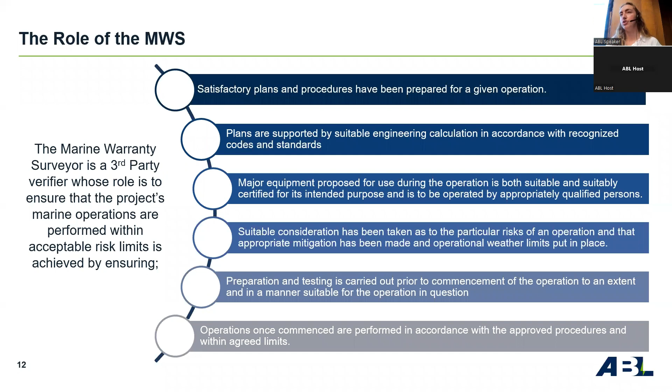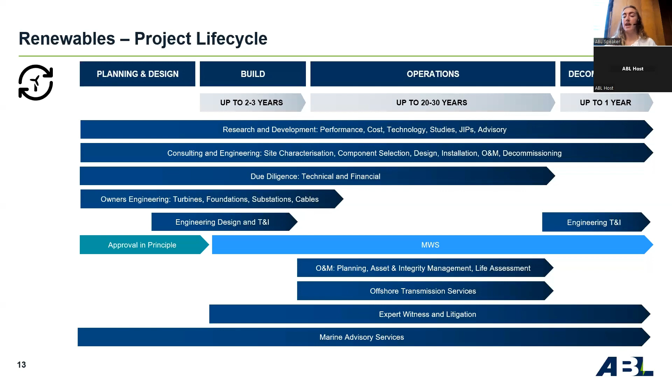As you can see here on the left, there's another aspect which the MWS may get involved in, which is called approval in principle. So this is mainly for projects which have innovative or novel methods or technologies that are going to be used. And this is to help ensure buy-in from an early stage and make sure that there's inclusion of all of the potential risks.

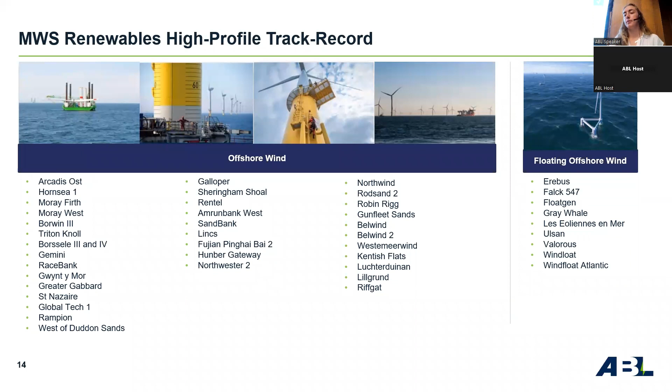So this presentation is going to outline some of the risks and emerging risks in fixed and floating offshore wind, which are based on our experience. And as a group, we've worked on over 330 offshore wind projects, not just from an MWS perspective, but also owner's engineering and analysis. So I'll now hand over to Paloma, who will talk about the future of offshore wind.

Right. Thank you, Charlotte. Okay.

All right, so let's look at where the industry is heading towards. We can all agree that offshore wind is booming, and with the need for more clean energy, it looks like it's only going to continue to grow. So how can the industry make more energy?

First of all, we can have bigger wind farms. We can put these wind farms in deeper seas. We can have floating wind, so we can actually put the wind farms in deeper seas. There are also alternative energy sources, such as wave, tidal, solar. Ocean thermal energy conversion, OTEC, have become an attractive new method for islands who are looking to have sustainable energy methods.

There's also the new concept of having energy islands, such as the ones being developed in Denmark and Belgium. And all those methods are powered by new technology that is constantly under development. And of course, with great power comes great responsibility. So what safety standards are we developing, and how will they shape the industry?

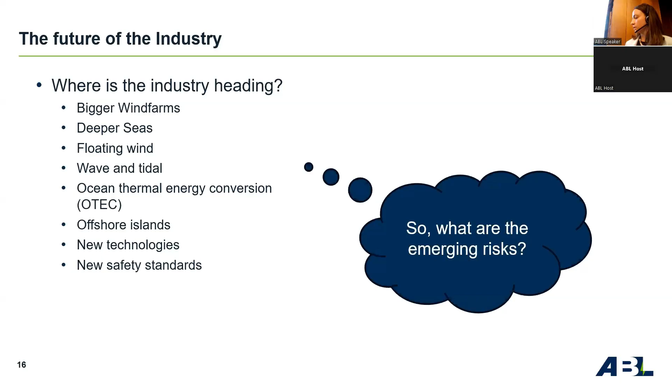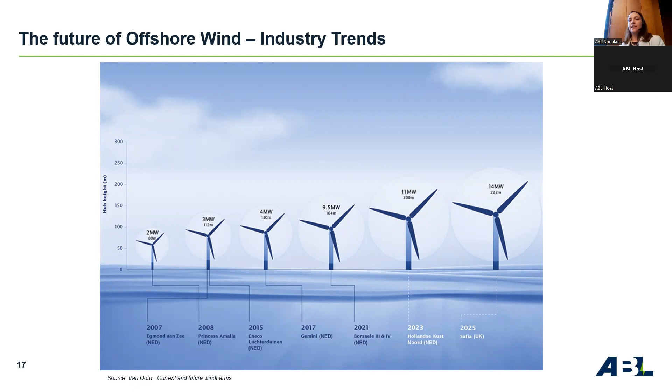The increase in power rating and size of the turbine brings new challenges and risks in the design, the installation, the maintenance, and at some point even the decommissioning. In this next figure, you can see the offshore wind farms that are being developed in Europe, and it compares the distance to shore and water depth. We see the trend is going towards further and deeper seas.

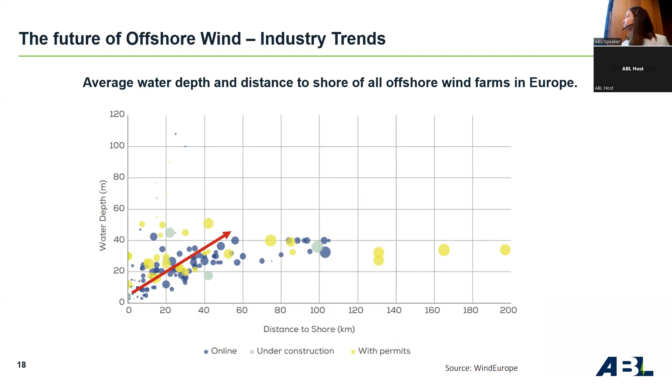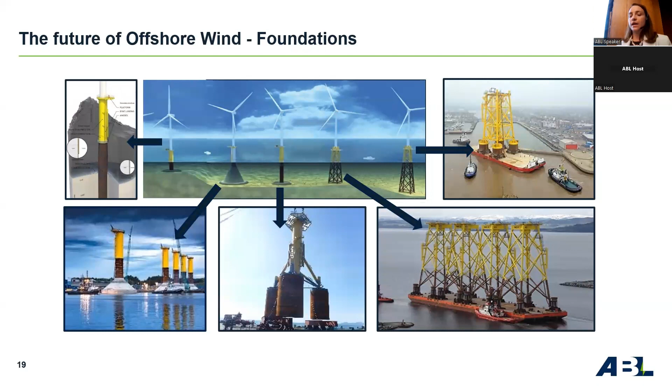So foundations are a key element of wind farms, and the designs can vary. Here we see the different types of foundations we currently have, which are monopiles, gravity-based, and different types of jackets. As the turbines increase in size, this requires different solutions, which is where placing wind turbines on floating foundations would be the next step for offshore wind, as they can be installed in a more restrictive seabed or further offshore where you can find stronger and more consistent winds.

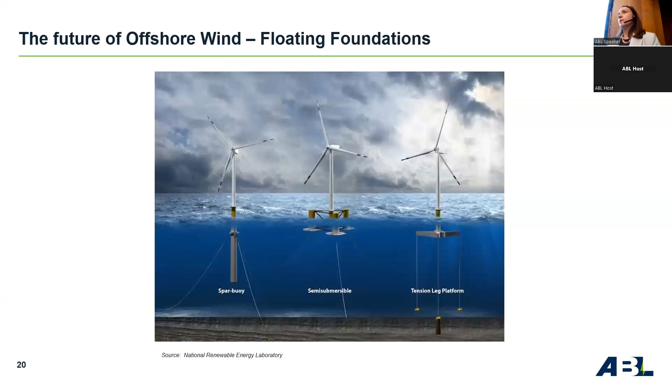However, this technology is still in its early development. There are currently numerous designs and solutions. We have here three of the main ones, which are semi-submersible, tension leg platforms, and spars. For example, WindFloat in Portugal is a semi-submersible 3-column floating foundation, and Hywind in Scotland is an example of a spar buoy floating submersible, which can be installed in water depths of up to 80 meters.

So all aspects of the wind farms are increasing in size. This includes the jackets, the substations, requiring bigger vessels to cover their transport and installation. The substations are very similar to oil and gas projects, and as they go further offshore, their concept and uses vary. Some of these OSS are manned, and others only provide a minimum accommodation to support the offshore vessels.

Now, these substations are also called OCPs, offshore converter platforms, and these are used in the offshore renewables for HVDC conversion for energy output. ABL's largest OSS installed was 10,000 tons in Germany. And we have spoken about floating wind farms. So what about floating substations? So this is the Fukushima floating offshore substation. And this was the first of its kind and was moored with 4 spread catenary chain lines.

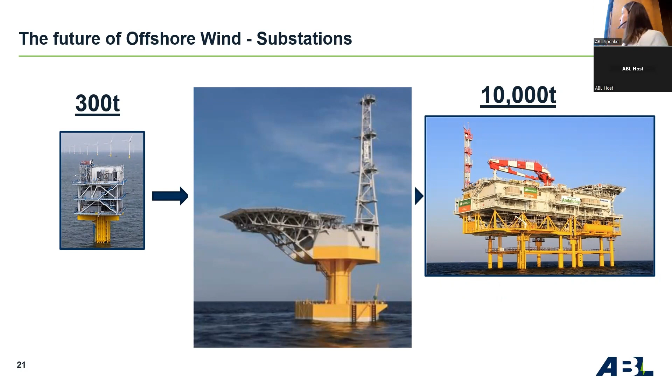So the complexity of the offshore wind project is also increasing. And as the projects move further offshore and increase in size, the conventional WTG installation, which is normally done on a jackup, as you can see on the slide, oh, you can't see it, on the left side, these jackups are limited by the length of their legs. And so we will need new methods to install these turbines. And here you can see the vessel on DP installing a turbine.

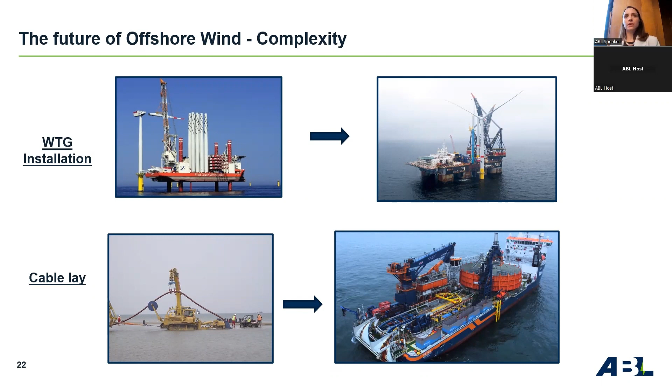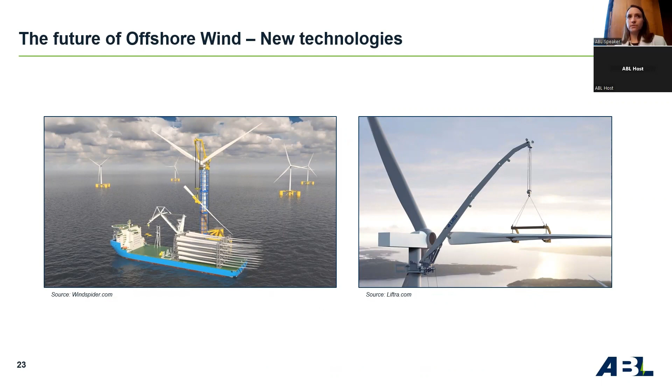For cable lays, we see that near shore, we can use dredgers with a quadrant. But as you go deeper and you go offshore, we'll need cable lay vessels. Finally, novel technologies are constantly under research and development to try and overcome the new challenges posed. Some very exciting new concepts are being created, but how do these realistically fit within the offshore wind sector? So now let's have a little look at what risks we will see in the fixed wind farms.

Secondly, we have the risk of needing new technology and procedures that have never been used before. As we conquer new, deeper seabeds, the conventional installation method of the jackup is not valid anymore, and so alternative methods are required. This is the example of the Arcadis Ost, which was the first floating installation of a turbine, and that just happened in November last year.

A method to identify and mitigate these new risks includes contractors testing the new equipment and carrying out mock-up trials, which can be done on-site or even as a simulation. As MWS, one of the ways that we can help mitigate these risks is through assessing the documentation and the procedures and attending the operations to assure that these procedures are followed and reduce the risk. Often for the first installation in series, we will ensure that the weather limits are lower and more stringent until competency for the installation is proven, and then the limits can be increased.

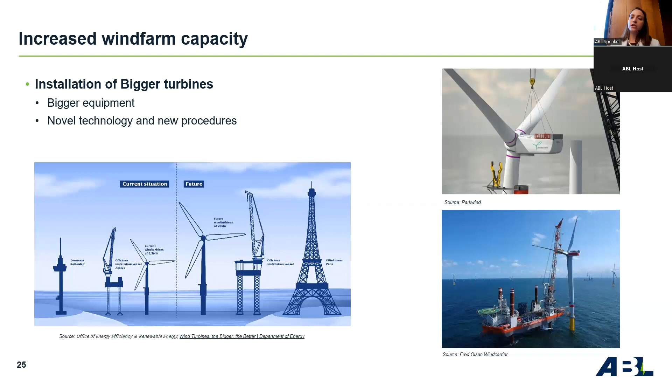In addition, good communication with the MWS is important. MWS companies have a lot of experience and lessons learned from past projects. As Charlotte mentioned before, ABL have worked on over 300 renewable energy projects. Always retaining third-party independence, of course, the MWS can add value, increase the understanding of projects and advise on the success and failures of past practices, as is done in oil and gas currently.

Right, another risk that we need to look at is the qualification and experience of our contractors. On the one side, we have the current contractors who are trying to keep up with the increasing work demand of the projects, and they grow their size rapidly with new and inexperienced technicians, and they don't always provide the necessary learning tools or time to develop properly. On the other hand, there are the new players who want to get involved in the industry, and they do this by lowering their prices during the bidding process.

The clients and the contractors need to be aware and do due diligence when selecting the contractors to ensure they have sufficient knowledge and experience for the specific operation, to not generate an additional risk. It is important to remember that this attractive low price might become expensive in the end, and focusing on quality is a good way to help de-risk the project. A risk to consider is interaction between the contractors as well. A wind turbine will have different contractors for the foundations, the cables, and the turbine components, so good communication between the main players is important to ensure that all the risks are understood correctly.

And finally, another risk from the contractors is, again, the misunderstanding of the role of the MWS. The International Marine Contractors Association release from 2022 specifies that the contractors should be involved in the selection and basis of engagement of the MWS. This is because when they apply for a project with a lump sum, comments from the MWS have cost them some money, so they should be involved in the choice of who makes these comments. This kind of goes against the whole point of having an MWS to reduce the risk.

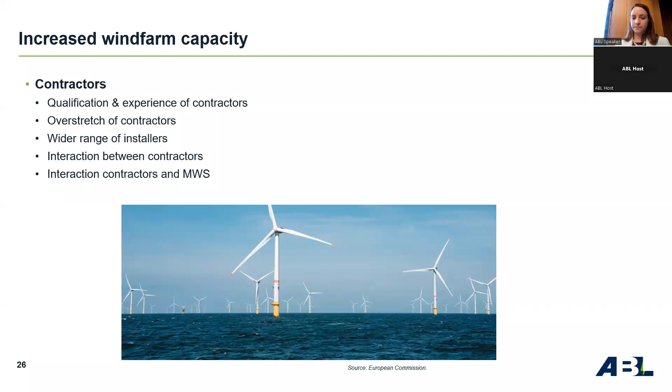Right, so we have discussed the installation of turbines further offshore in the deeper seas. So what other risks will this bring? First is the environmental risks, environmental limits. These will remain very similar as we move further offshore. However, you will encounter worse weather conditions, which can lead to smaller weather windows and consequently weather delays. In addition, these areas are typically higher energy seas, and they bring big risk when you're looking at installing a tower onto a monopile. Consideration from both client and contractors needs to be kept in mind. This communication between all parties is key to capture the installation risks and the interface between the components.

In addition, due to the lack of vessel availability, many operations are taking place in the winter months, which again increases the risk of weather delays. And these are not just weather delays on the installation, but also on basic crew changes, such as helicopter and CTV changes.

Another risk we have touched upon is the drive to reduce cost. For example, in fabrication, selecting locations where cost is less to produce, or due to the lack of local facilities with the capacity to carry out the work, this can lead to longer transit times and, again, more delays. There are tools to carry out voyage simulations and metocean analysis to help identify and mitigate these risks that are associated with transportation. The image here presents, can I point?

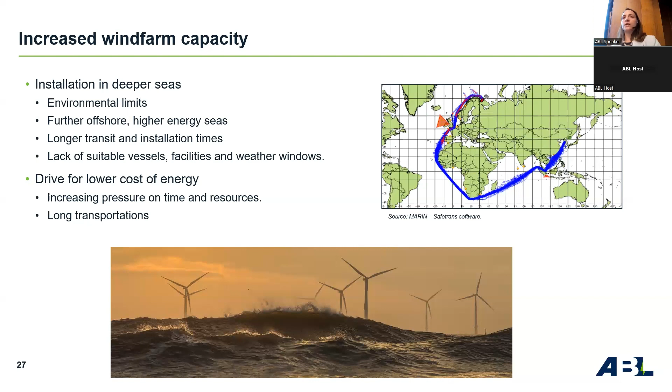Now, this presents an example of a sea transport analysis, which highlights in red, for a transport going from Asia to Northern Europe, where the weather criteria will not be met. Due to many projects running in series and the vessel availability, there is a knock-on effect on projects with delays, and this can push a project to be carried out at a different time than originally planned. So it might go into September and October when it was initially planned to be done in June or July.

Now, cables. Cables make up about 40% of the insurance claims. However, they are around 80% of the cost. A single export cable can cost up to £12.5 million to repair. It means that it's the most expensive cost for the insurers, and it creates the most worry.

So what types of claims are we looking at? There are three main areas where cable failures take place. It can be a fault from the manufacturer or a design defect. It can be a fault during installation. This is where you can find damages such as compromised MBR, tension, compression, or possibly physical damage from a dropped object or an anchor strike. The last one is latent defects, which can be from manufacturing or installation, but the damage only shows up later in the life of the cable, perhaps after 10 years of being installed.

For a cable to be repaired, it needs approximately 32 days from when the damage takes place to when the cable is repaired, and this includes getting the procedures, finding a vessel, and actually carrying out the operation. But of course, some can take even longer and be more complex. Some cable manufacturers are going into framework agreements with cable repair companies to ensure that they are prepared in case this happens and reduce the time and cost of such operations.

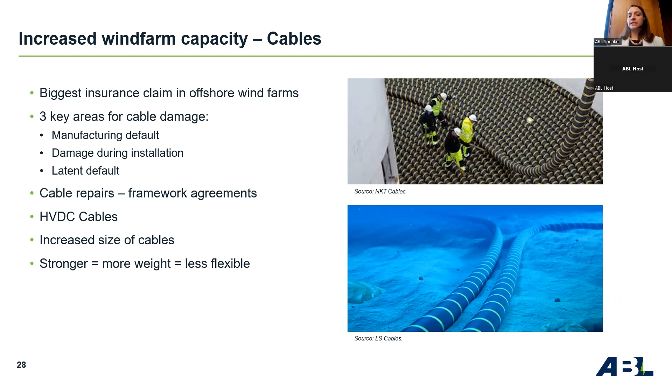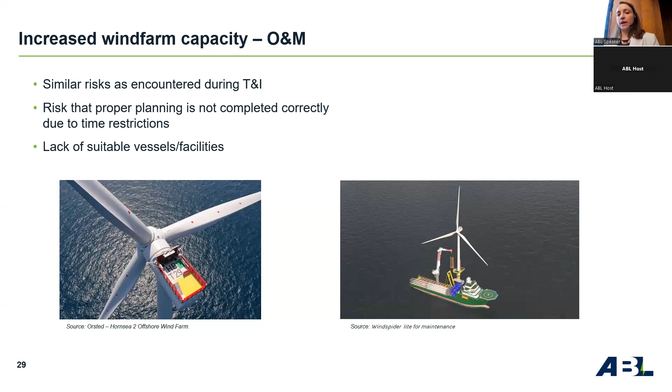Lastly, we will look at O&M. We will see the same types of risks that we have covered in the previous slides, but there are some additional risks that O&M will bring. These operations are usually carried out in a much shorter time frame than the T&I and are more reactive in nature. The process of creating documentation and preparing for operations can be undertaken in a couple of weeks, and therefore it's important to ensure that no corners are cut in this process. Having a client rep to oversee operations offshore to ensure the proper processes are carried out is a good way to mitigate these risks.

And now I will pass over to Charlotte. Thank you very much, Paloma. And now I will talk about some of the risks in floating wind farms.

Floating offshore wind is predominantly in the demonstration phase, with most projects still under development. There are a few operational floating wind farms: the one Paloma mentioned off Scotland, Hywind Scotland, and also WindFloat Atlantic off the Portugal coast. These demo sites are much smaller in scale than typical commercial operations, with the two mentioned having 5 and 3 turbines respectively. However, they are useful for increasing understanding of floating wind operations and collecting data.

Floating offshore wind obviously brings about new challenges compared to fixed offshore wind. Primarily, this is due to the increased distance from shore and the depth at the sites, as well as the very nature of floating wind and having a moving platform, which greatly increases the complexity of the operations.

So one of the risks to projects will be the lack of suitable vessels and facilities. So this has a few different aspects. Firstly, tow to site. So for towing the wind turbines to site for installation, this will require anchor handling tugs with a very large bollard pull, possibly about 220 tons or more. However, there are only a limited number of vessels of this size, about 50 in the world. Therefore, more vessels will need to be built. Otherwise, this will limit the capacity for projects, as they are already used for other purposes.

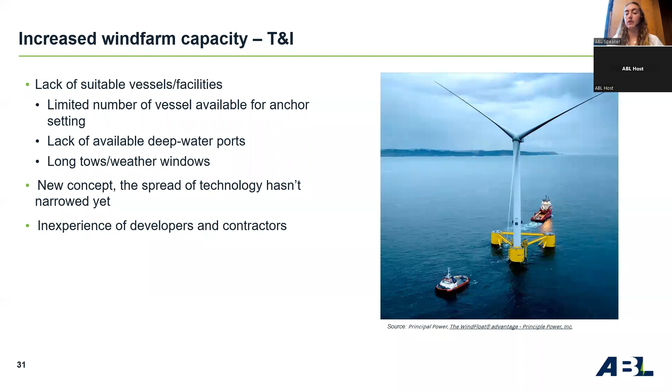So it'll be important to think about whether there's been consideration of the contracting mechanisms within the project. Have you considered the experience that the developers and contractors have in carrying out this sort of work? Has there been sufficient testing, risk assessments for the new technology or methodology that's being developed? So moving on, we will take a look at cables for floating offshore wind.

So for these cables, one question is to ask, how will it be done safely and successfully, ensuring that the cable integrity is not compromised? Has there been sufficient consideration of the design and the fatigue life? So for floating offshore wind, it's typically dynamic cables that are used, which have increased complexities, increased length. They take learnings from offshore oil and gas projects. So their installation is more complex due to the installation of buoyancy modules.

One other major risk is that there's no specific design codes for dynamic cables currently. Instead, the requirements are based on those for similar structures which may not be representative. But it should be noted that data about failures and maintenance from demonstrator projects and early projects will likely be used in future to better understand the fatigue life of the cables, in addition to extensive onshore testing.

So one other risk is increased handling of cables. So if the turbines are required to be towed to port, such as for maintenance, this could increase the number of times the cables need to be connected or disconnected. So we need to look at how much does this increase the risk? So to tackle this, there are many systems in development looking at different connection types and innovating designs to increase efficiency in operations and to reduce the risk if the cables do have to be connected.

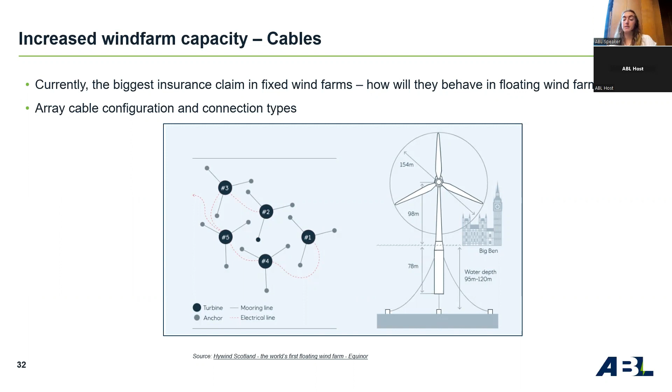One example of this is plug and play connectors, such as used for the Windfloat Atlantic. Innovative solutions such as these may reduce some of the risks of cable handling. However, they'll need to be carefully tested and assessed to ensure they don't cause additional problems. We'll now look at the mooring systems. So these are similar in some concepts to oil and gas.

However, unlike oil and gas projects in which they typically have one large structure with multiple lines, in floating offshore wind, there's likely to be large numbers moored, each with a minimum of 3 lines. So one major aspect is looking at optimization of the systems for cost while respecting the redundancy requirements.

So some learnings from the oil and gas is regarding the failures of mooring lines and chains. In floating offshore wind, there's obviously a lot more structures moored. So there's an increased risk of failure compared to something like an FPSO. And also we have to look at the fact that there's large motions of these floaters. Another difference is that these floating offshore wind turbines are unmanned. So things like routine maintenance are more challenging.

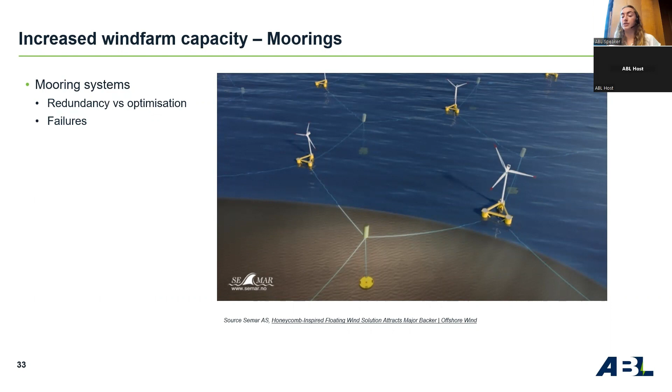And moving on to look at O&M. So this is something, as I've mentioned, where there's tow-to-site solutions and also in-place solutions. So as the floating offshore wind develops, the number of these technologies will reduce and experience will be gained by personnel. So in development of these solutions, the involvement of marine warranty and third parties at an early stage is good practice and ensures that the risks will be considered. This will also help in the approval process.

So for the tow to port, obviously there are restrictions such as the weather is a big one of them, the port availability, which I've mentioned, the risk of the connecting and disconnecting. So these are the different risks that you have to weigh up depending on which solution. As mentioned, the weather plays a large part in the project risks. Although the weather limits may be similar to those for fixed wind, due to the location of wind farms further offshore, there's likely to be higher downtime due to the higher energy seas and decreased windows for possible maintenance.

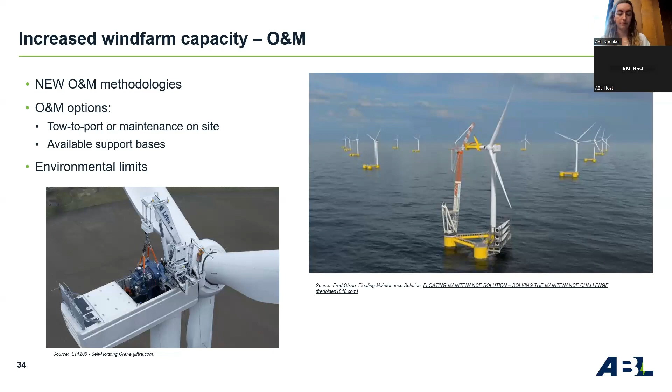Part of the consideration will also need to be into how projects are managed due to the possibility of operations being carried out in marginal weather otherwise, as people rush to try and get the job done. In addition, other aspects to be looked at are human factors, such as the training of personnel to tackle this lack of experience. So moving on, we will look at a couple of other aspects that could pose additional risks to offshore wind and should also be considered.

So one of these is climate change and resilience. So obviously climate and weather play a really important role in the design of offshore structures. And they're an important consideration during the lifetime of structures, from the transport and installation stage all the way through to the decommissioning. There are obviously many potential impacts of climate change, not only the change in temperature that could cause the sea level to rise, but also the changing weather systems could result in changing wave heights and wind speeds. And given the reliance of offshore wind on these climate systems, it's something that should be considered.

Typically, we use current and historical data as a baseline for future design. However, it doesn't take into account potential changes that might be seen in the next 20 to 30 years, considering the design life of new structures. So when looking at new designs of wind farms, it's something we should ask ourselves, are these designs suitable for the future? Have the potential changes in the environment been considered?

And finally, we'll take a brief look at the risks in contracting for both prime contractors and MWS. Although there is a shift coming to more of a cost plus time and materials model, a lot of the upcoming projects already have locked-in lump sum contracts, which were signed some time ago, and therefore contractors will need to service these contracts, which may not finish for another 3 years.

Due to rising costs of resources, there is a danger of contractors not being able to complete their scopes or trying to buy themselves out of contracts or taking legal action to seek additional funds and cutting corners to try and deliver to a budget, the latter of which is obviously the largest risk for the insurers.

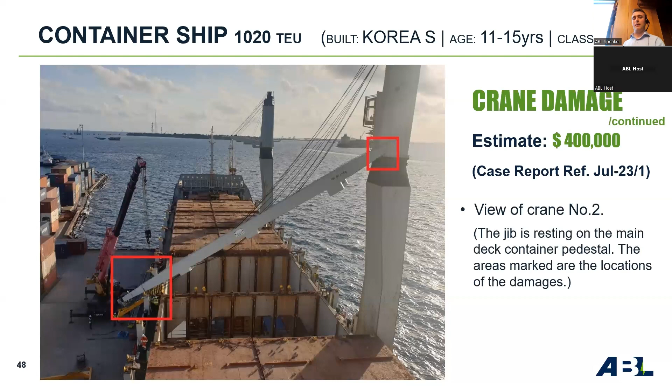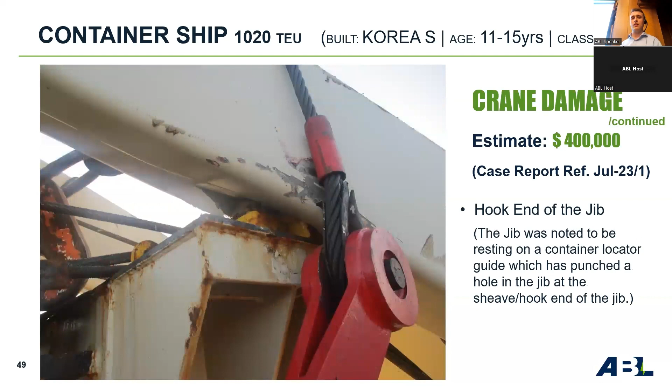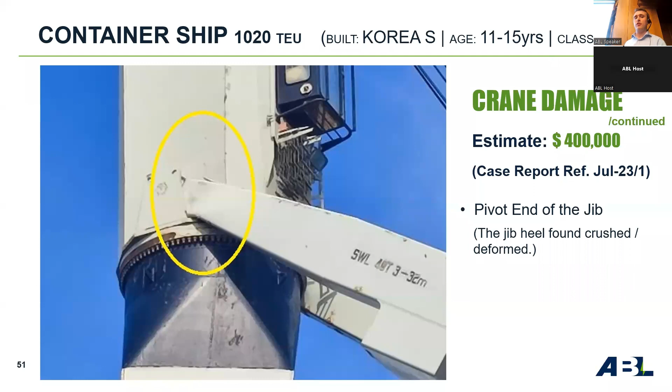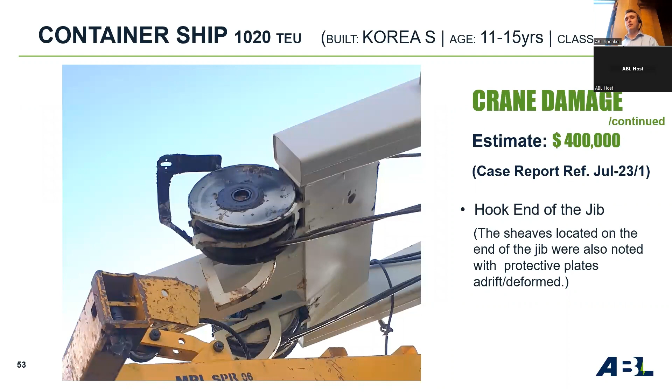Let's take a look at the damage at the end of the jib. At the hook end, here we see the arm of the jib is impaled on the container locator guide. And here we see the same thing on the other side. And here we can see, if you look closely, the pivot or heel of the jib has been damaged too on the slewing ring. Damage is clear if you look up from below. Lots of associated damage too, the sheave blocks, deck rails, and so on. The luffing wires and the hoist were also damaged beyond use.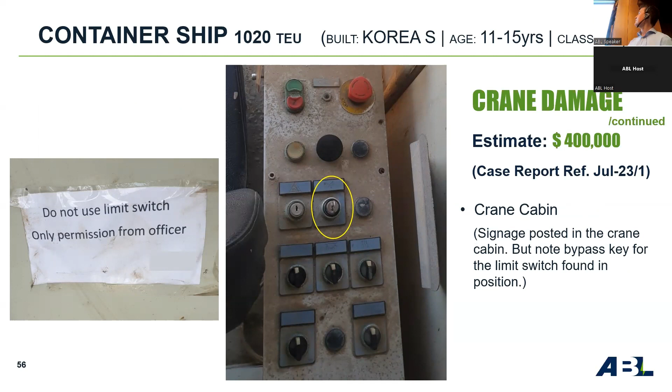Next up, we have a 16-year-old Suezmax tanker that appeared on our list a couple of months ago, having been towed to a Mediterranean repair yard, suffering $1.8 million worth of catastrophic damage to her engine's main bearings and crankshaft journals. The manufacturer's service engineers attended on board to carry out those repairs. The process of dismantling the engine found another $400,000 worth of damage.

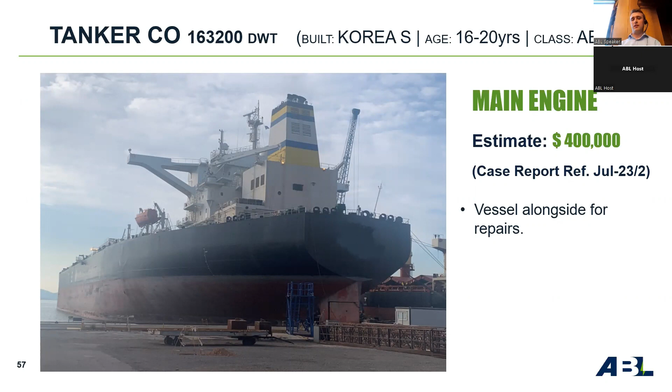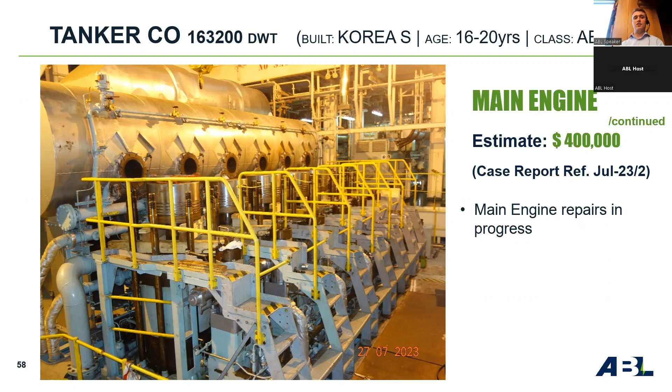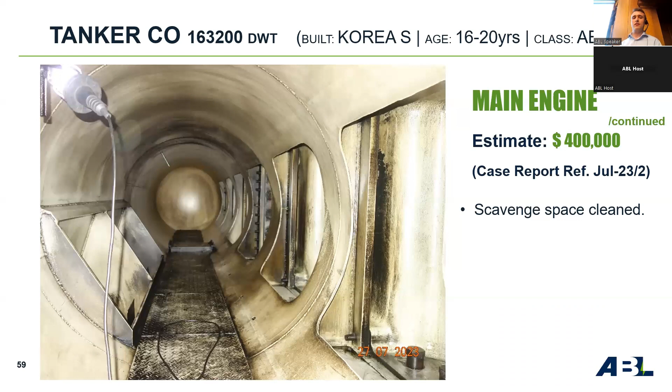The compressed inlet air is cooled and stripped of its moisture and passes into the scavenge air receiver, ready to pass into the engine cylinders, where the pistons move to the lowest position and expose the scavenge ports of the cylinder liners, these openings in the lower end of the liners. The pressurized air rushes into the cylinders and displaces the gases out of the exhaust port into the exhaust gas receiver we saw earlier, and so on.

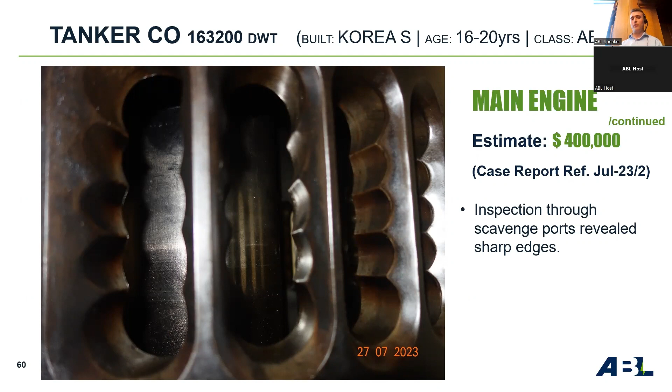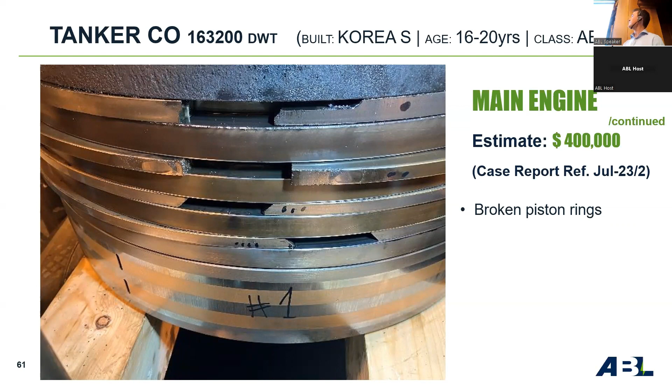Anyway, getting back to the point, I understand this is where the service engineers may have spotted the additional damage, as they noticed that there were sharp abrasions on the inner surface of the scavenge ports, indicating that there may have been some sort of contaminant in the lube oil or fuel at some point. When the engine was dismantled, they found classic symptoms of the presence of cat fines in the fuel, broken piston rings, and vertical scoring along the cylinder liners.

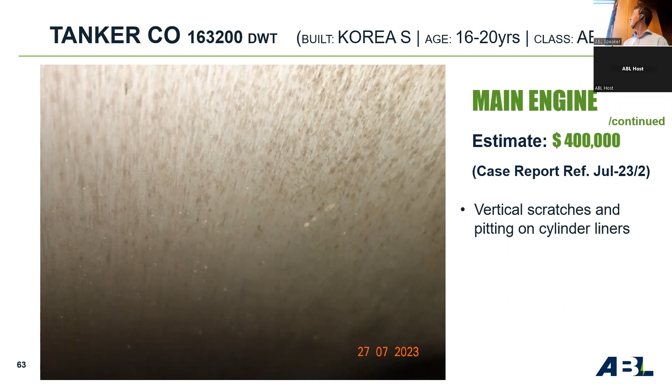Replicas were taken from all the liners. As a result, the catalytic fines were indeed discernible on the surfaces. The cause of the cat fines entering the engine is still under investigation. The big related questions are, as always, first, whether the fuel supplied and used since the last cylinder inspection was within normal limits for cat fine content, and second, whether the onboard purifiers were working properly and had been properly maintained throughout the period. Quite a lot of digging needs to be done.

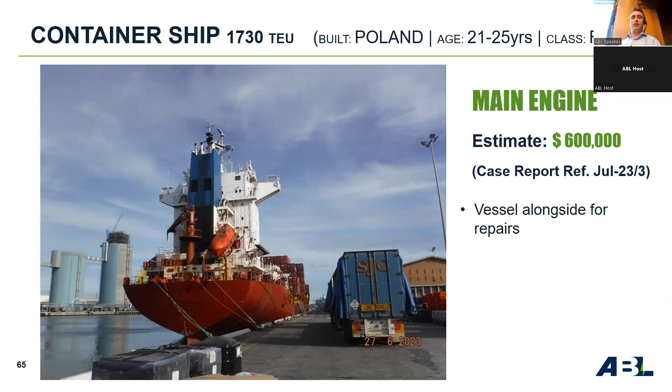The next case is for a main engine problem. It's a bit unfortunate. Had things gone right, it wouldn't have cost past $200,000, the threshold, and ended up on our high cost list. She's an elderly feeder container ship and was on passage in the Far East, where a crack was discovered on one of the main engine cylinder liners. Owners and authorities were notified; when the ship arrived at its destination, the containers were discharged and more containers were loaded as normal. They had spares on board to carry out the repair. They just needed to move to a quiet wharf to carry out the liner replacement.

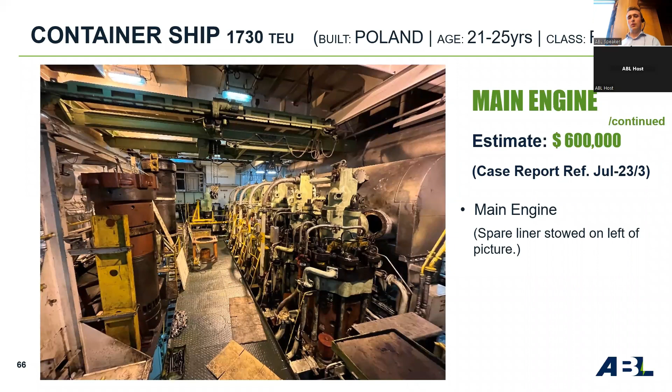Here on the right, we see the main engine, and on the left, you can see two of the spare liners that they carry on board, secured to the side of the engine. Shouldn't be any problem making the change. Take the cylinder head off, whip out the damaged liner, and put the spare one in. Here, behind, waiting for the spare, we see the old cracked liner now successfully removed and stowed. The crack had developed between two of the upper quill holes. These holes are where the lube oil supply nozzles or quills are inserted. These quills feed the cylinder liner surface with lubrication at strategic moments during the piston's travel up and down within the liner.

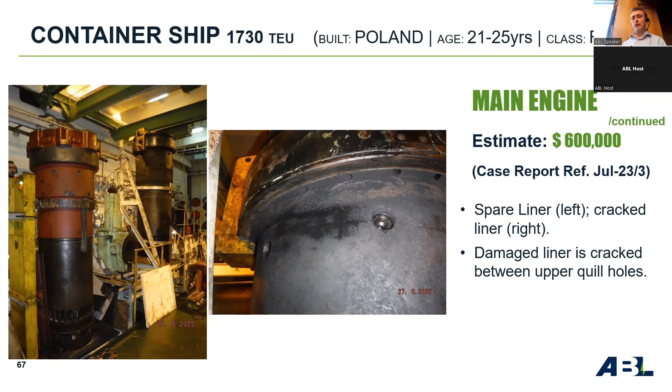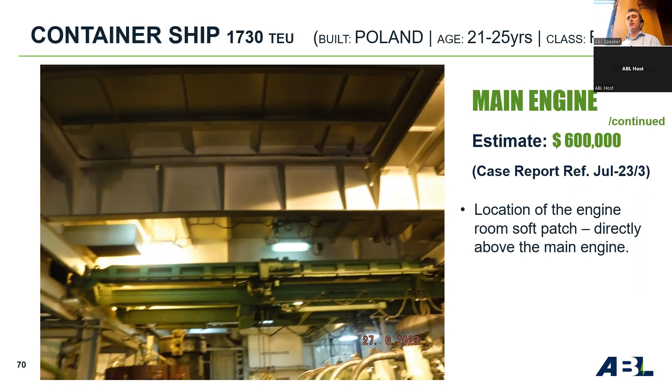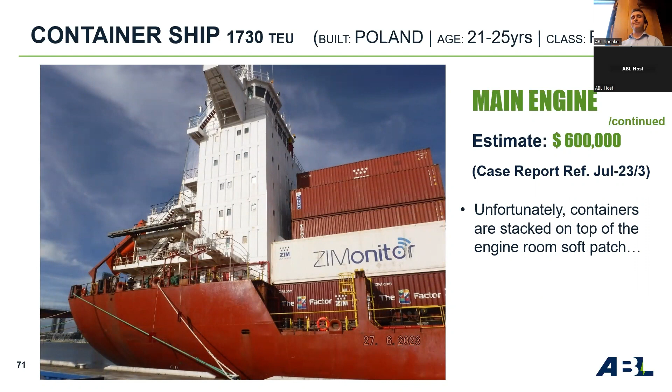Here we see the spare liner is now inserted into the engine casing, but there's a little problem. The quill holes in the liner do not line up with the quill holes in the casing. The spare liner is the wrong one for this type of engine. They checked the second liner. This is the wrong type too. This all meant that they had to order a new liner, air freight it, and get it to the engine room. In principle, getting it to the engine room wasn't a problem, as above the engine is a soft patch where they can access bulky items to get in and out. Of course, they hadn't planned on having to use it, and they had stowed containers on top of it. Yes, the access hatch is below this lot. So they would need to discharge again to get the new liner in the engine room.

So the process, from taking 2 to 4 days and probably less than $100,000, became a repair that ended up taking 25 days, involved air freight of a part, crane assistance, 2 tug moves, cargo discharge, and reloading, along with a rather large bill of $600,000. The cause for cracking of the original liner is still underway.

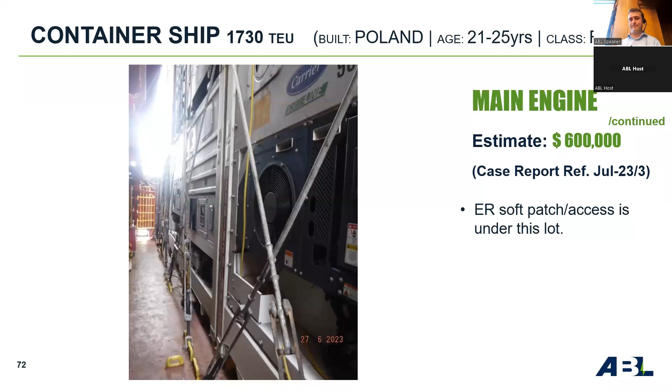This is a 10-year-old 156,000 deadweight tanker, which was in dry dock for its second special survey, where white metal fragments were discovered when dismantling the stern seals.

Things didn't go entirely smoothly in the repair either. They had already detached and repaired all 4 controllable pitch propeller blades in order to replace the O-ring seals when they discovered white metal fragments. This meant that they had to take off the blades again and remove the rudder in order to be able to withdraw the tail shaft and look at the stern tube bearings.

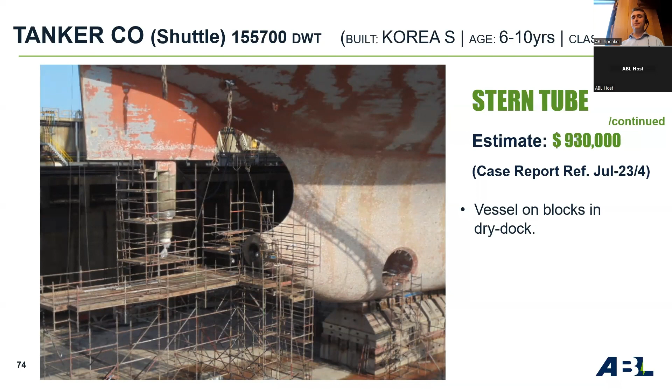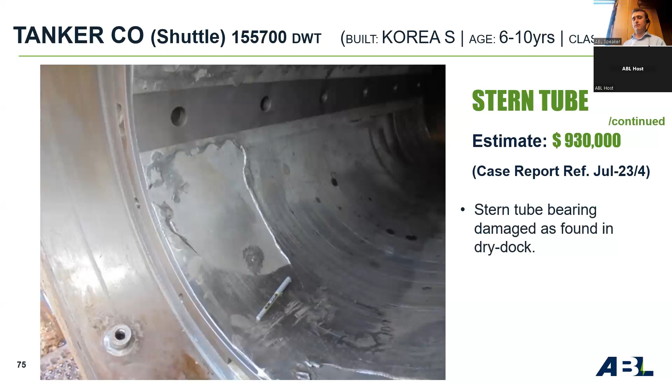And this is what they found. The aft bearing bush had been heavily scored, with metal worn out and peeling near the propeller end, though I understand the forward bearing is fine. With overheating and fretting being evident, the manufacturers recommended a new bearing. With damage like this, lots of checks have been made on the condition and alignment of the tail shaft and the engine with respect to the stern tube bearings.

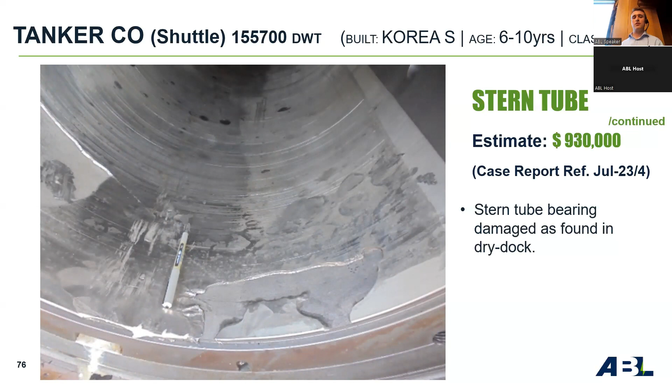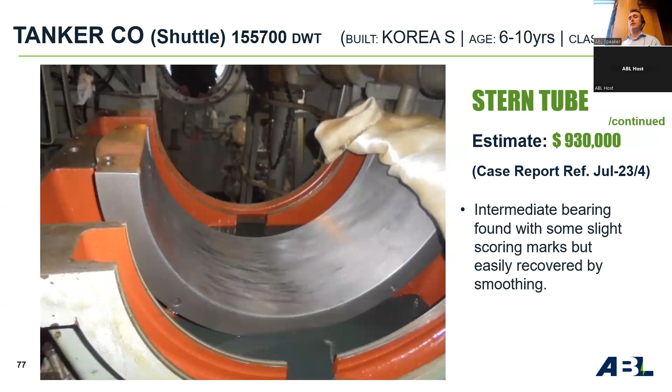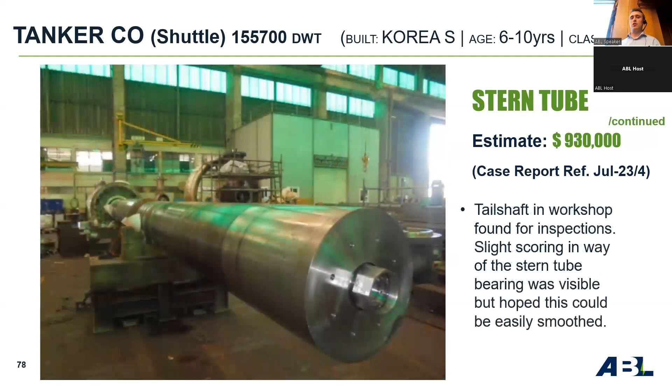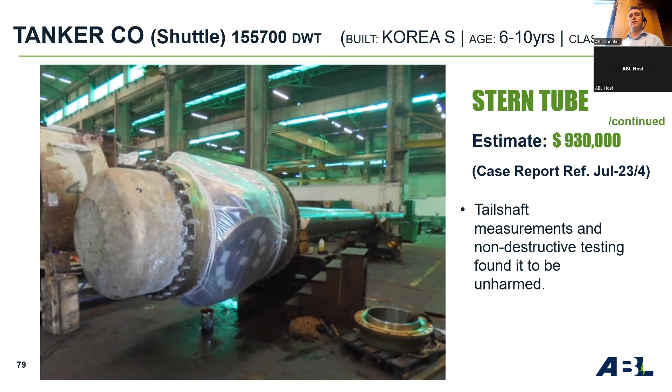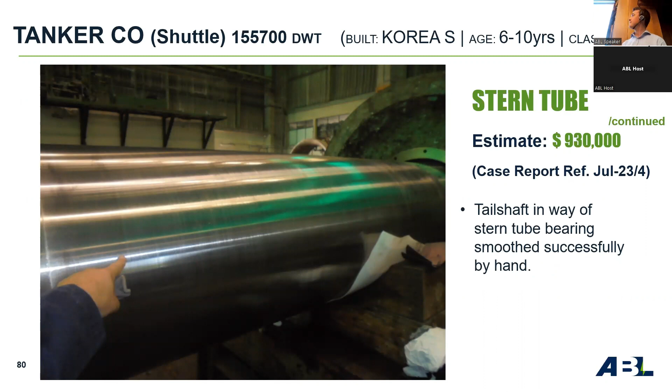The propeller blades and pitch actuation system were also checked, and no significant damage was found here either. So quite a lot of dismantling, checking and reassembling was required, contributing to the overall cost, but no further major parts apart from this aft stern tube bearing.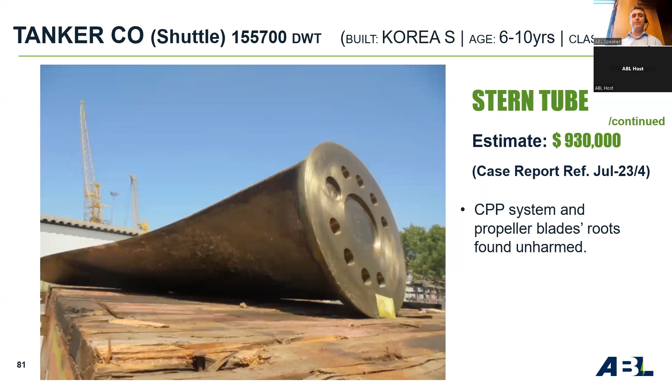As to the cause of all this, it is still under investigation. One possibility being investigated was the fouling of fishing lines. The ship's crew provided a photo of the propeller when the vessel first arrived in the repair yard, and it seems to show something colourful in the rope guard. This seems strange though, as it wasn't investigated before the propeller blades were put back on for the first time, as you can see there.

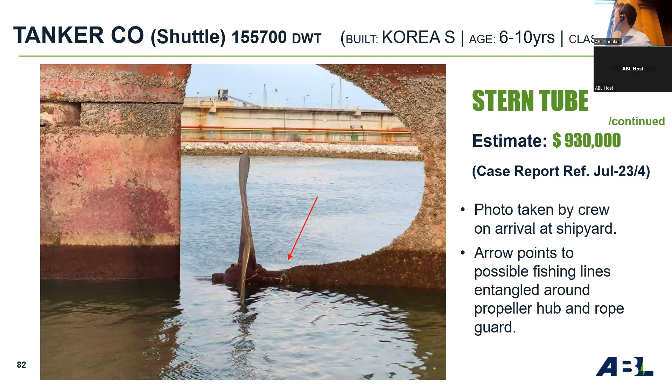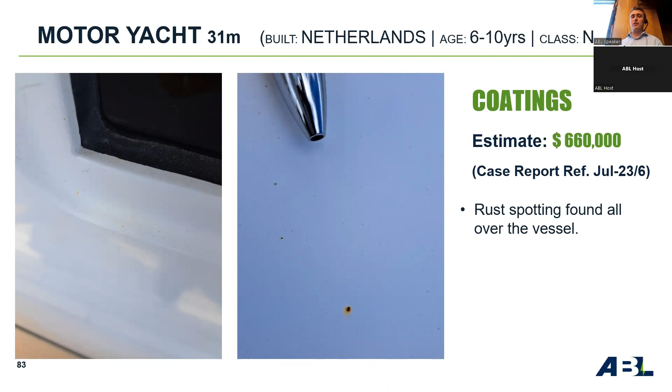Finally, we have 3 cases involving corrosion on our list this month. The first is about $660,000. This is a luxury motor yacht that had been transported on a heavy lift ship, and it seems that hot iron filings from the ship's exhaust had landed all over the paintwork. Some of these had melted and then rusted. Difficult to see unless you look very closely, but a whole new paint job is required nonetheless.

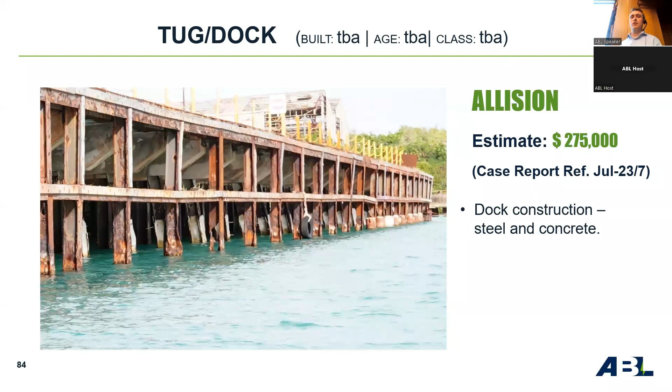The second case, concerning an alleged allision between a tug and a steel concrete dock in the Americas, was more interesting to look at. I understand that the dock owners were very upset that the named tug had made a dent in the piling system where the tugs and barges were supposed to safely tie up. Our surveyors were not very sympathetic to the owner's claim, however.

If you look closely at the structure, there is literally not much of it. The webs and vertical members had almost entirely been eaten away by corrosion, so offer next to no lateral resistance. I'm not sure if it had been established whether the tug in question was actually anywhere near this part of the dock, and even if it was, the old question, fortuity or inevitability, is perhaps relevant here.

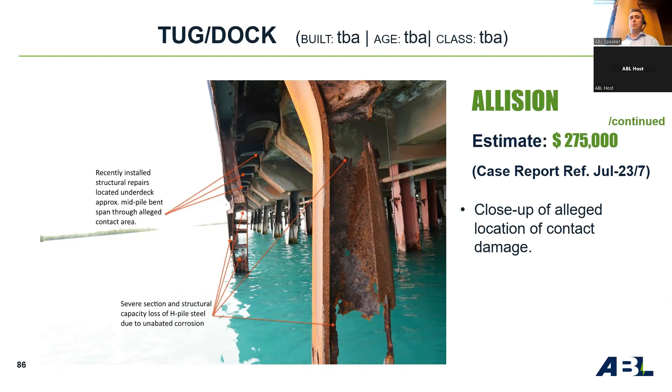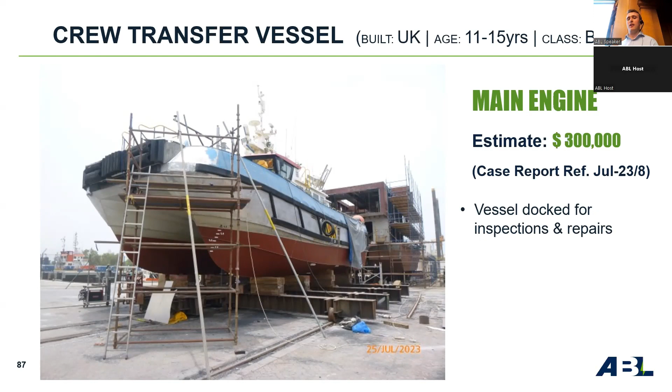And finally, the third corrosion-related case involves rusting, rather unusually, of both engines of this small 12-year-old crew transfer vessel. The vessel had been operating in the Middle East, but had been idle for about 10 weeks. She had been wet towed from another location for reactivation back into service. Allegedly, during the reactivation process, they discovered that both port and starboard main engines had seized. Dismantling the engines, they discovered not a lube oil failure problem, but rather a corrosion infestation problem.

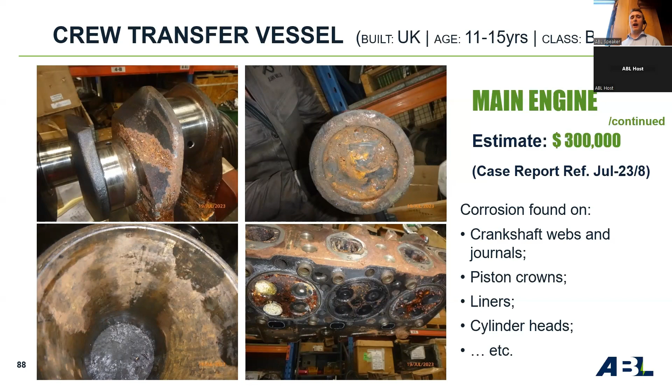Here's just a few pictures of the components that had rusted. Seawater was found in the engine sumps, and standing water above the pistons in several cylinders. How the water got into the engines is still under investigation. One possibility being examined is that it may have entered through the exhaust outlets during the tow, which, as you can see, would have been very close to the waterline. If that was the case, it could be argued that the preparations for the tow were somewhat wanting.